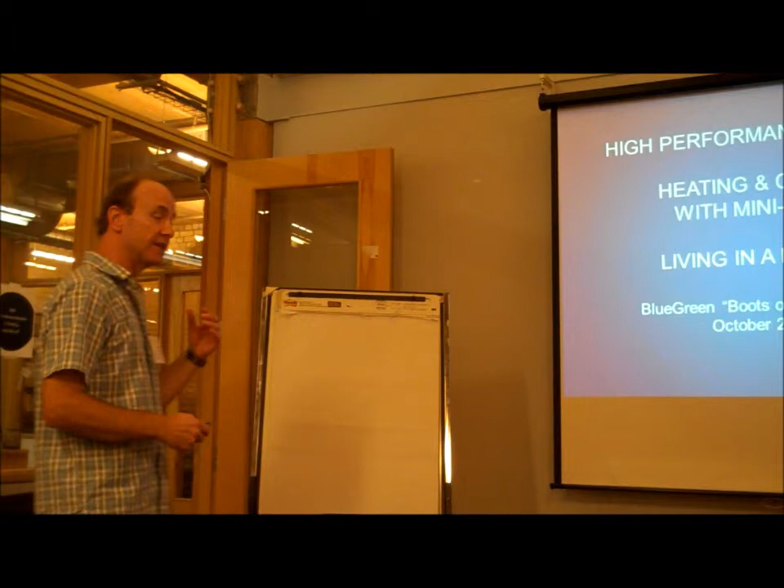Greg threw out some different topics, and I decided to speak on these things. It's a lot to pack into 15 minutes, so fasten your seatbelts. I've done 3 projects now, and I'm about to do my 4th one. The caveat is I haven't got this figured out - there's still a lot of work in progress here. Some things I thought were really great ideas, some not so good, and some will have to go back to the drawing board. But I'm happy to share those experiences with you.

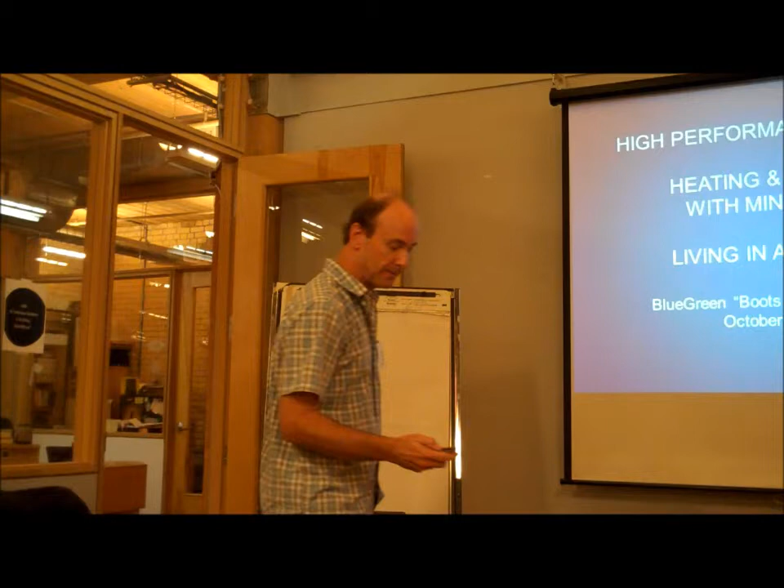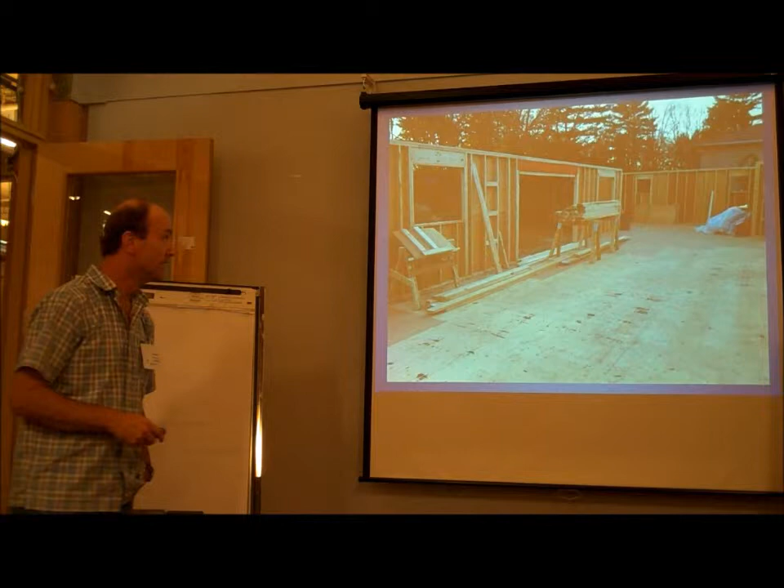Part 1. This is from my recent build, a new construction - the Sandwell build. I want to run you through a high-performance wall, an R42 wall. This is the wall in its inception phase, where the sperm enters the egg, I suppose, and fertilizes it, and you have all of a sudden the beginnings of a high-performance wall. What a great analogy - somebody write that down, I want to use that.

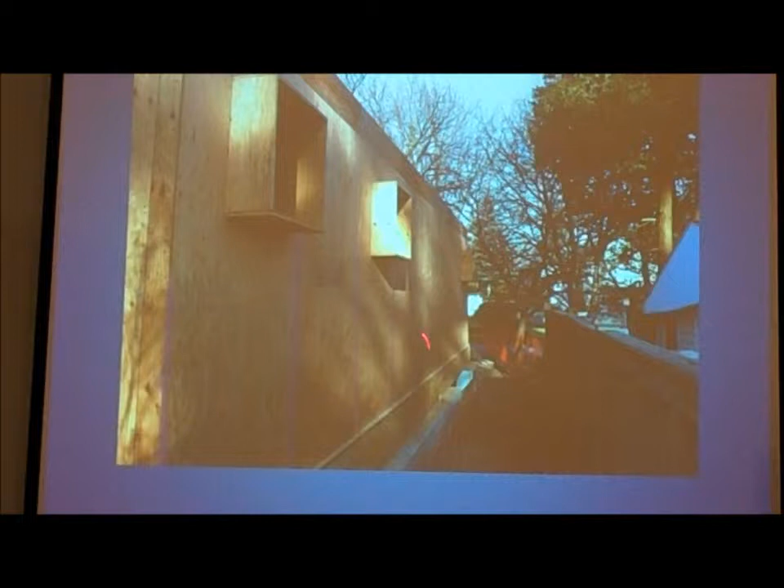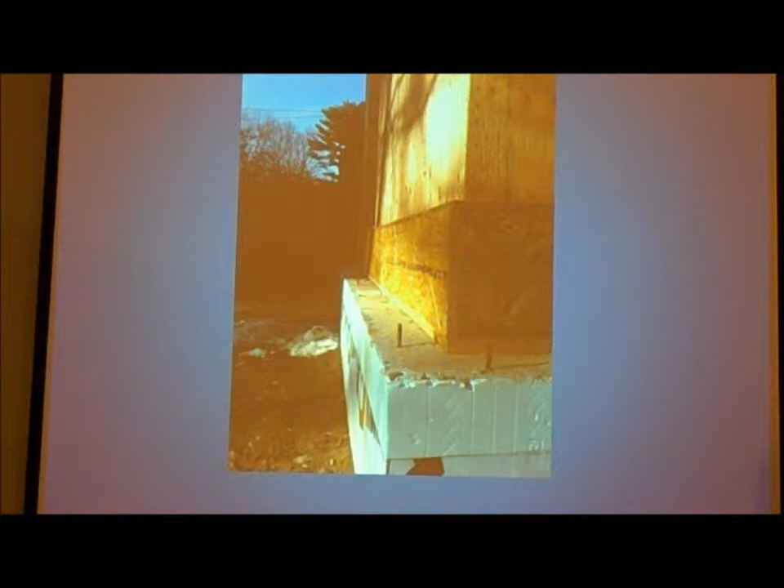You have basically a 2x4 structural wall with plywood sheathing on it. This plywood sheathing forms part of the air barrier, which is designed to be in the middle of the wall assembly so the sheathing stays warm in cold weather. You can see the window bucks are there for spanning through the larger wall to come. This is a side view of the floor platform, sitting about a third of the way onto the foundation wall. Typically it would line up with the edge, but this is the structural wall. There's some bearing left for the wall to come, which isn't structural, it's just holding up insulation.

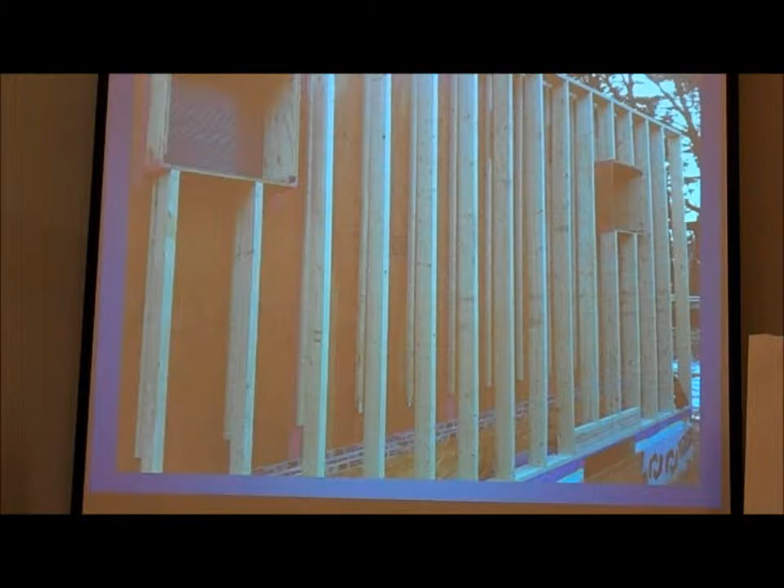Here it is in progress. These are sleepers going against the wall now to create cells, basically. The plan is to insulate the outside wall with cellulose insulation, and cellulose, though I have limited experience, likes to be installed in cells rather than one big open wall cavity. So this is the next phase - a 2x6 wall going up in front of it. Now you have a 2x4 wall on one side, the air barrier, and about an 8.5-inch cavity being constructed on the outboard side of the air barrier.

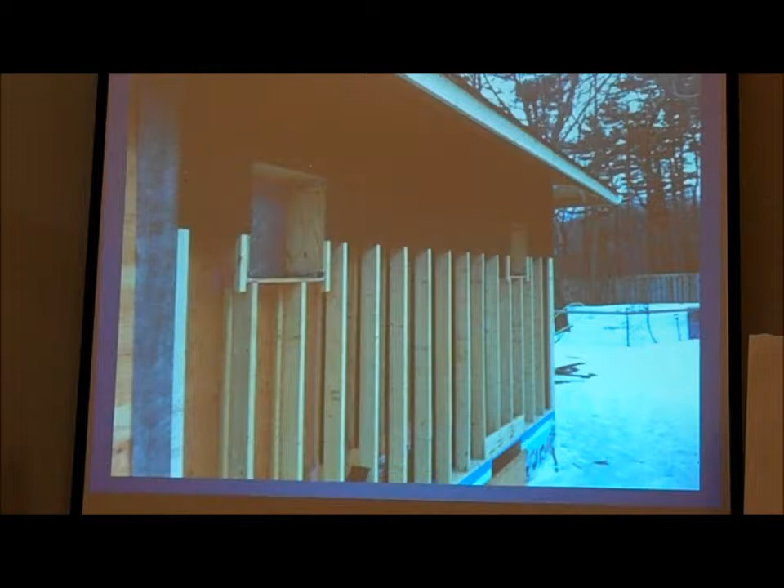This is good old tentest sheeting being applied to the outside now - its main job is to hold in the cellulose. There it is again with the windows installed. In between each of these cells, you can see this black material - strips of the same sheathing to create cells in between the walls, because there was about a 2.5-inch gap between this 2x6 and the sleeper against the wall. This is what it kind of looked like.

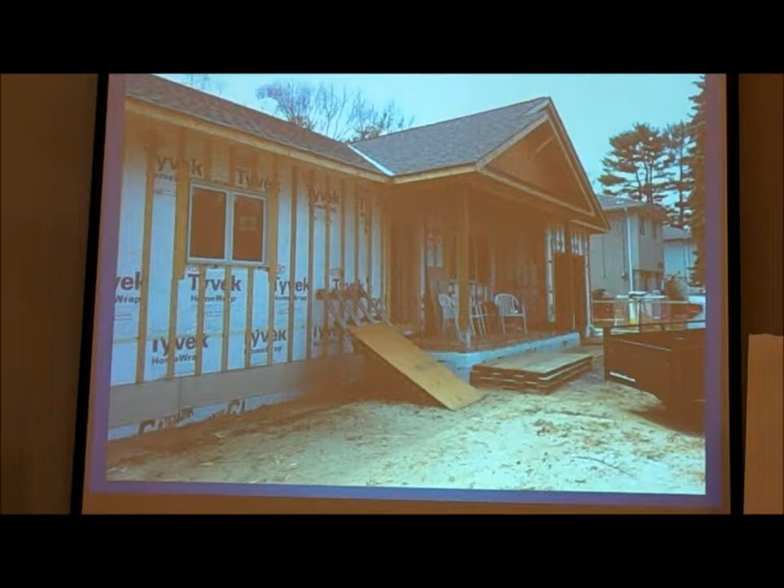By the time the installation crew showed up, all the building wrap was on the wall, and the strapping, hopefully to prevent the tentest sheeting from busting out once the cellulose got installed. One thing to note: your choice of building wrap is important here. If you're trying to build a wall with drying potential, you want the materials to not short-circuit each other. The sheathing behind there has a permeance of 35 perms, highly permeable in case any moisture gets into the cellulose so it can dry to the outside. Tyvek is actually a lot more permeable than Typar, about 4 or 5 times as much, so it was the right choice here.

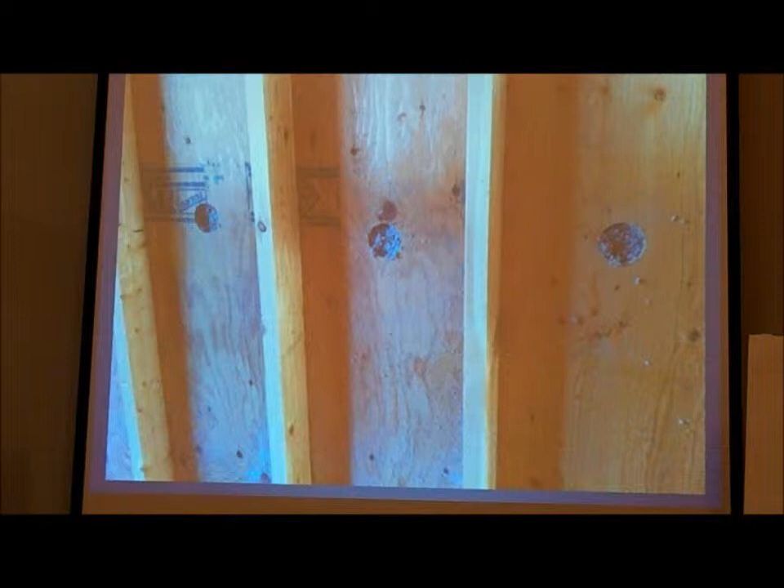This is what the building looked like with its tuxedo on. Now this is the insulation going into the inside of the outer wall, installed from the inside. There aren't a lot of contractors with experience insulating deep walls. This is something, I guess, if we're trying to push the envelope - we design these things and make plans to execute them, but there isn't necessarily the knowledge out there in the trade community to give us what we need. So this was a very good lesson. The idea was to install the cellulose into the middle of the wall so it would fill top and bottom to an even density.

As it turns out, I thought little gaps didn't really matter. This isn't a blowout, just a small gap, probably smaller than a business card, where suddenly the cellulose started spilling out because we hadn't bothered to fill that one little corner. I figured it would bunch up and plug itself, but it didn't work out that way. So not a lot of this happened, but it's actually more liquid than I thought it was going to be.

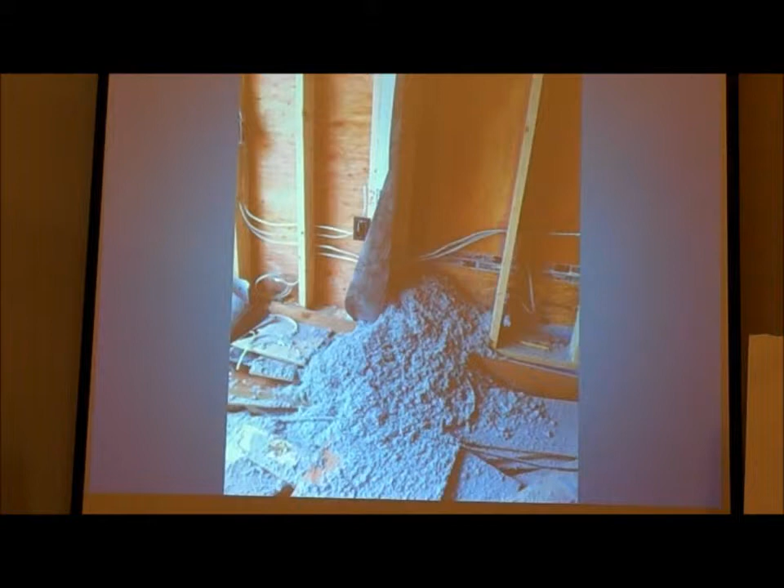The idea was to drill holes around the building and insulate top and bottom. When we did some quality control checks, courtesy of our friends at the Blue-Green Group, we realized we weren't getting proper densities at the top and bottom of the wall. So we had to drill all around the building again, top and bottom, to inject more cellulose into the wall, and then apply air sealing tape to the Swiss cheese it had become.

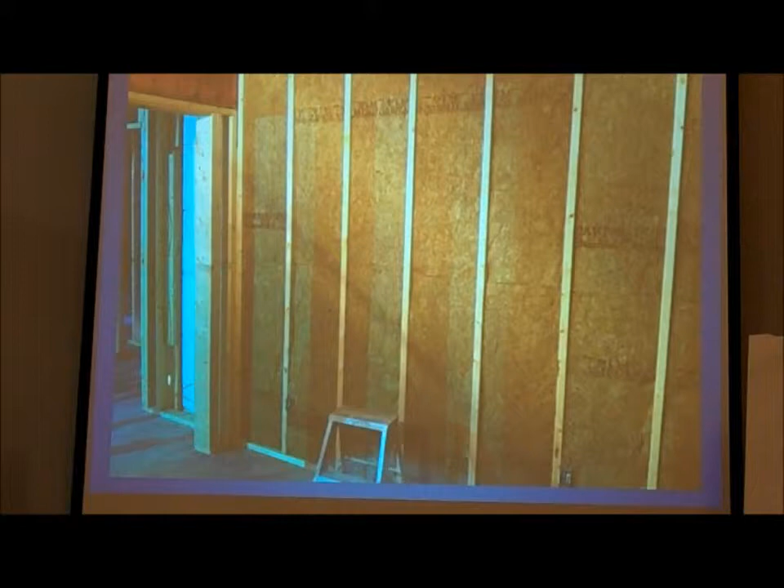And then finally a layer of bats on the inside. So the total combined value of that is an R14 bat plus about an R28 wall cavity, which gives you R42.

All of the structural elements are over-insulated by the cellulose on the outside, so the thermal bridging issue is very well addressed with this particular design. It would have been easier in retrospect to use some sort of I-joist, and there are reasons why I didn't do that, which I'd be happy to discuss later.

The blower door test came in very good. The air sealing details worked really, really well. So it was partially an execution issue and partially a design issue.

The building was designed to simplify air sealing. It was always forefront in the mind of the project, and one of the major objectives was to get us a very, very tight enclosure.

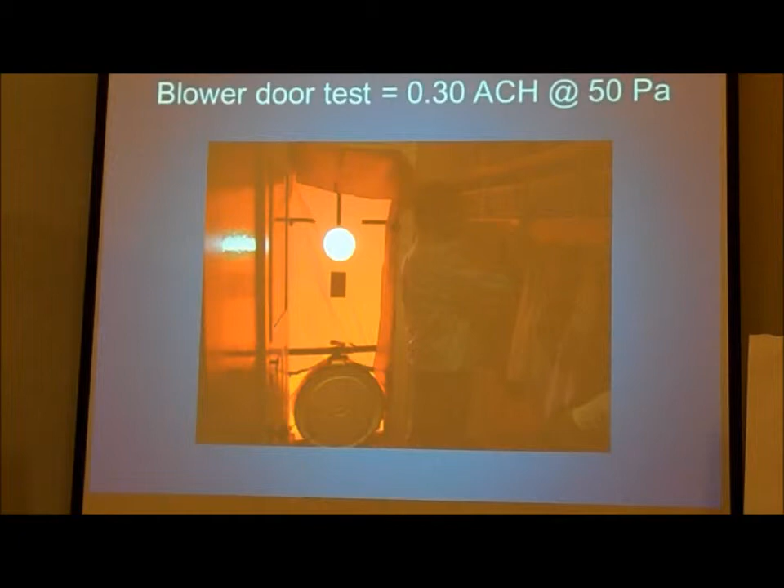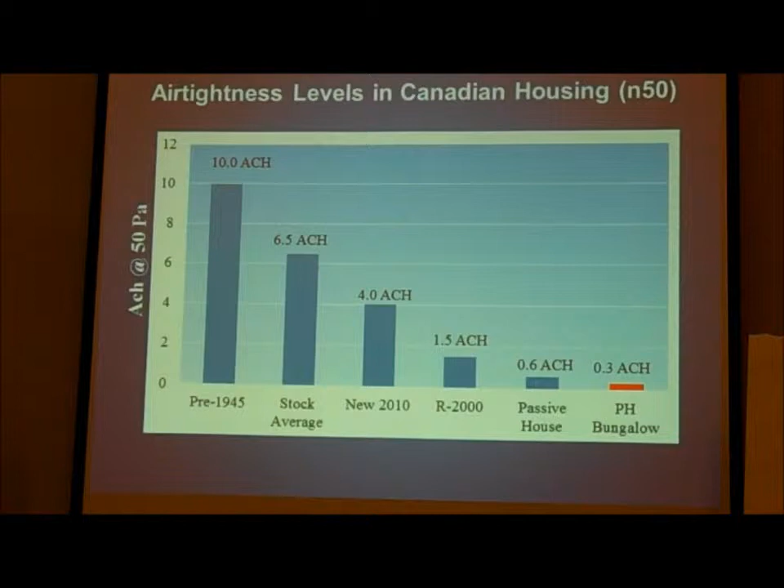Here's where we came in at 0.3, and this is passive house, and this is sort of like 10 down to 6.5—there's your 1.5, just to put things in graphical proportion. Actually, I could have left that slide out.

Next, I want to talk a little bit about mini split heat pumps.

It's kind of like a variety show. You had the juggler, and now I'm going to play the trumpet for a few minutes, and then we're going to look at something else. So...

Facts and fictions: a single head ductless conditions the whole house. This is just not true. It doesn't work—we know that now. The theory was that it could, but it actually doesn't work. I don't even know if it works in Germany where they say it works. So you do need a backup system, and a multi-head system kind of solves the problem, but now you're getting into a costly HVAC system. This is one of the challenges we need to overcome.

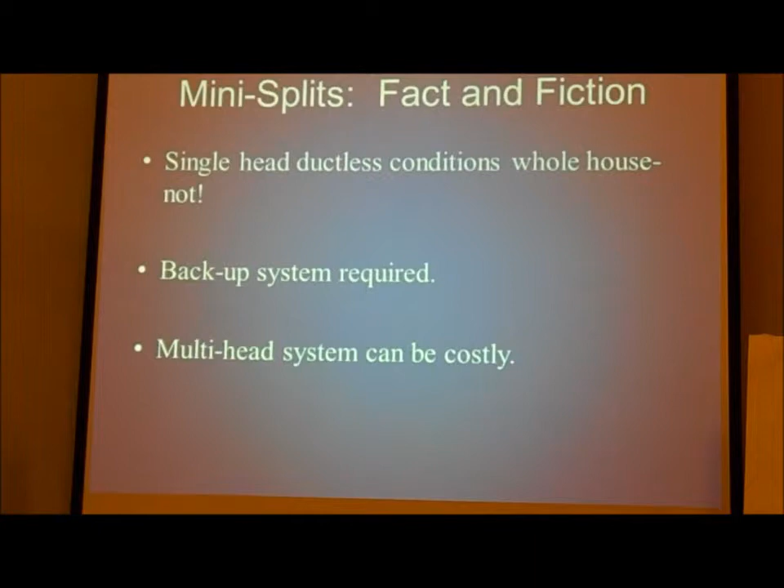The hope is we're building houses that don't need a furnace anymore. Well, we still need some sort of mechanical system—we still need heating and cooling. And how do you do it really cost effectively? I don't have the answer yet, and I don't think anybody does just yet.

This is sort of a little case study on my own residence. This is a retrofit, a deep energy retrofit I did in 2010. My wife and I moved back in 2011, and we've been running with these systems ever since.

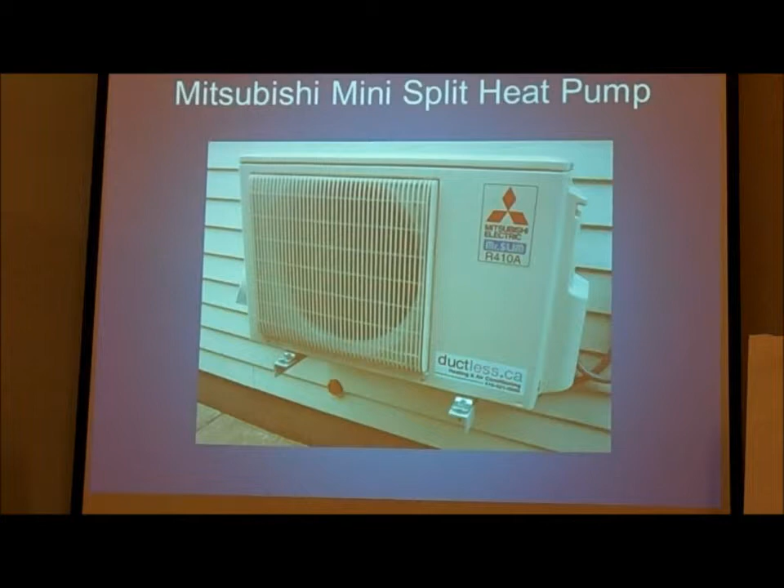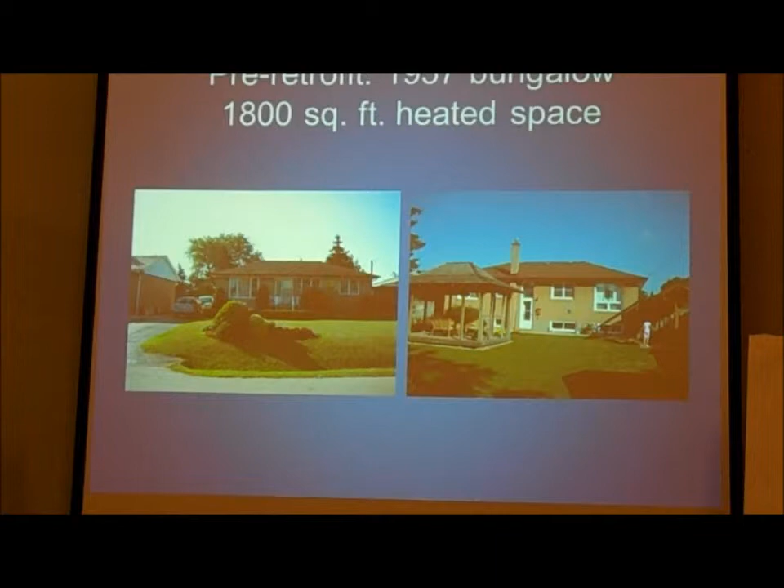This is the house before: a 1957 bungalow, solid brick construction, 1,800 square feet of heated space up and down. This is it post-retrofit now, oriented southeast to northwest.

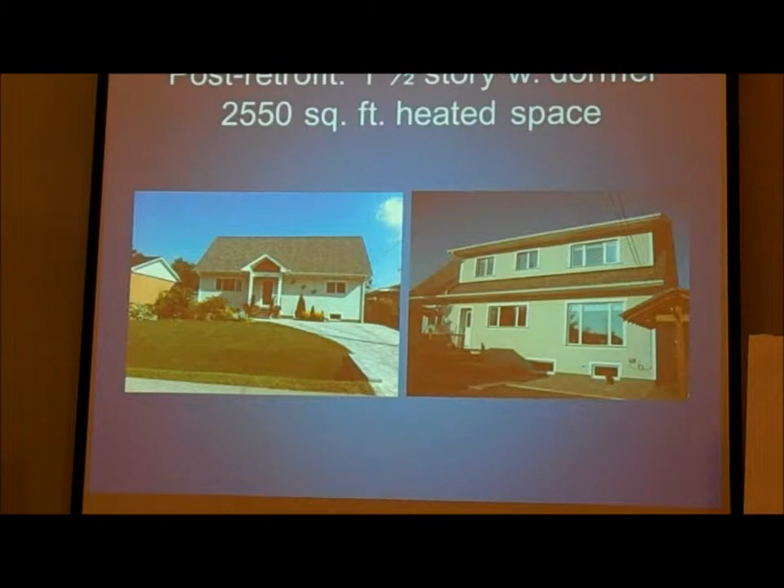I've got a broad overhang, so very good summer shading. This is taken on June 21st, so you can see the passive shading works really well.

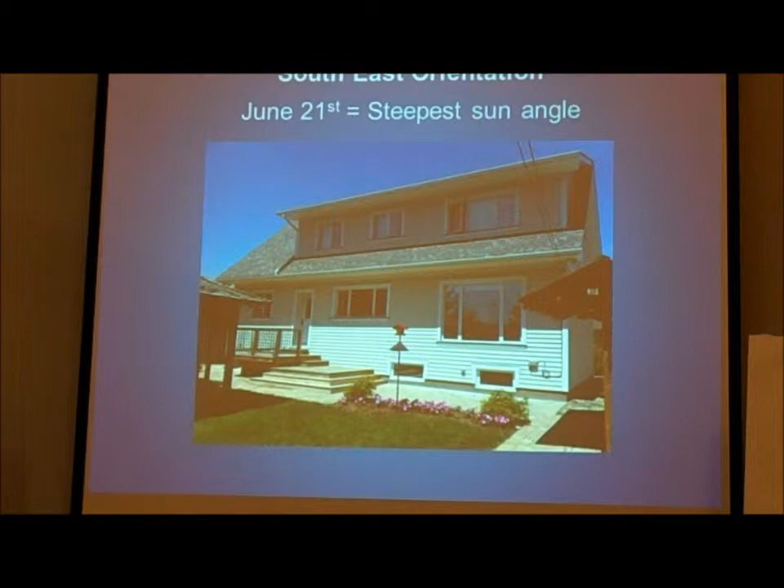A super insulated house like this is really airtight. It's like a thermos bottle with windows. If you have large direct sun exposure, it's going to spike up very quickly, and you're definitely going to generate a cooling load in the house.

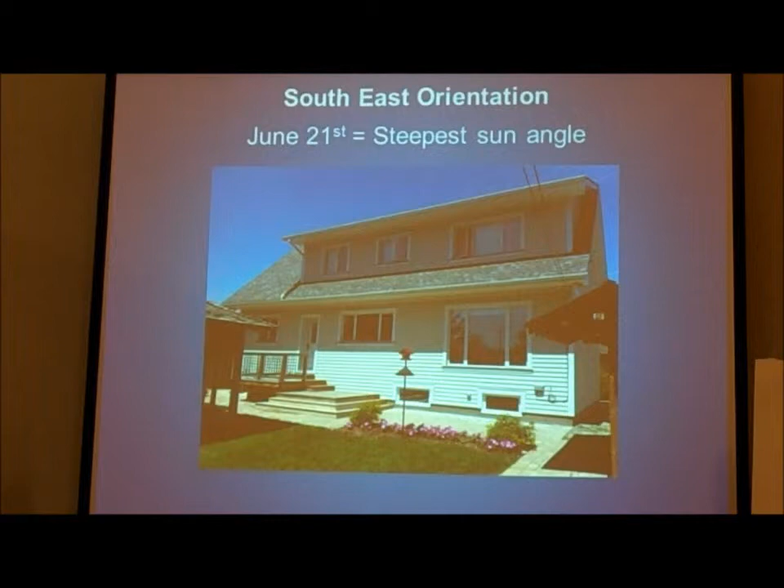Interestingly, we know this is the sun's steepest angle, but it's not the hottest time of the year. The hottest time is probably a month out, July 21st. By then, this sun line has moved up another foot up the window. So there's morning, probably a couple hours, of indirect or sharp angle sunlight, and then eventually perpendicular angle sunlight coming in, and it can spike up quite a bit.

This is it in the wintertime now. The sun just washes right through the house very nicely and right up against the back wall. So we have pretty decent solar access.

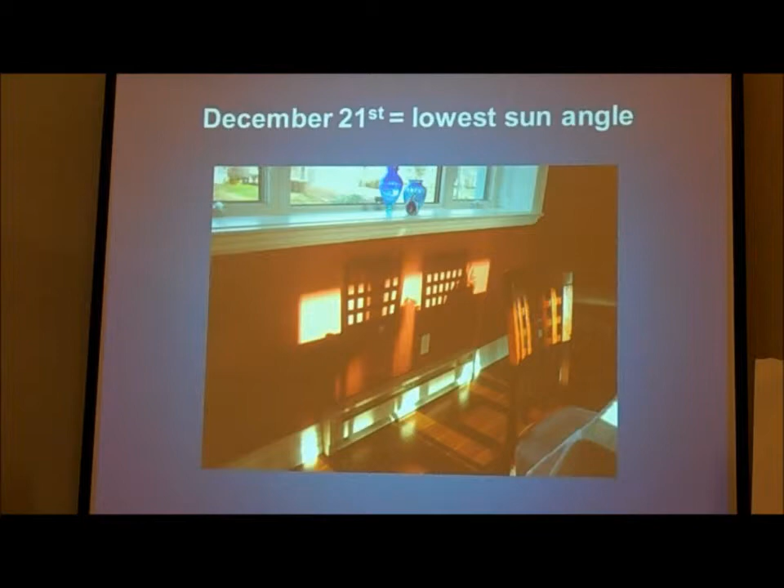The house is super comfortable. On a cold winter day, the heating system won't come on until late in the afternoon if it's a clear day.

There's excellent thermal comfort in all 4 seasons. Again, this is my actual experience of living in this house for 3 years now. Very little temperature variation from floor to floor, and also within a floor. From one end of the house to another, there's very good temperature uniformity.

The relative humidity is very good. In the summertime, it's probably in the 55 to 60% range, and in the wintertime, probably 45 to 50%. And that's without any mechanical intervention. That's just the natural state of affairs.

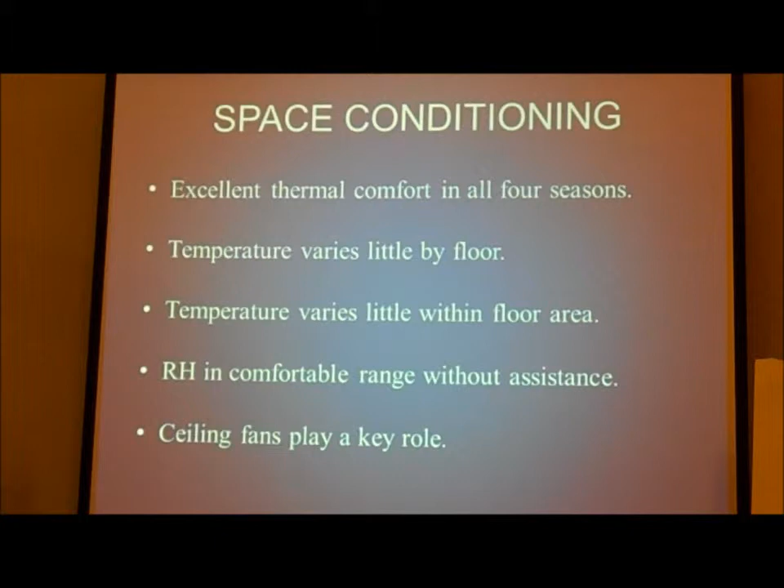There is an ERV that brings in fresh air 24/7.

In addition to the mini split system, I have a couple of zones of electric baseboard heating, and this is the thermostat I have it hooked up to. When I did this, I honestly wanted to believe the single point air handler was going to be able to cool and heat the whole house. It definitely has the capacity. The question was whether it could actually physically do that. And now I know that it won't.

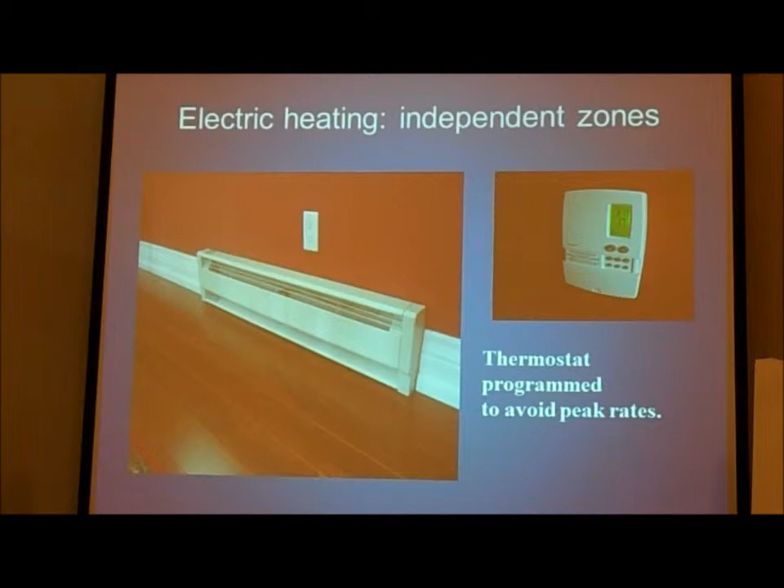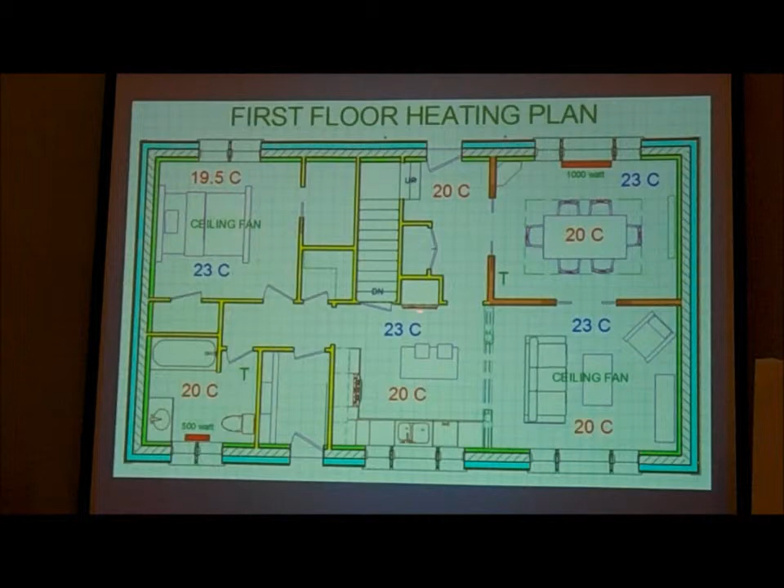There isn't really a thermostat, there's just a handheld remote that you set the temperature with, and I found it to be inaccurate. I don't know if anybody else has mini split systems, but I don't find it very accurate at all. It doesn't matter, you just adjust accordingly.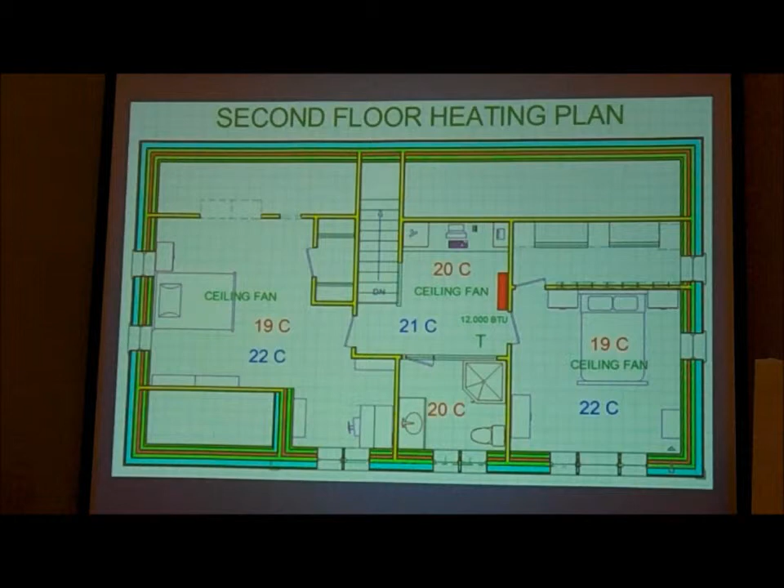Now, we've installed ceiling fans in here to move the air about. Before the ceiling fans, it would probably go up to about 23. So the ceiling fan helps move the cold air around the room a little more and increase the comfort level. 1 degree can make a big difference between not sleeping and sleeping, and this has made a big difference.

The ceiling fans were added in about a year later.

In the basement, we keep the door to the basement closed. There's no cold air from the AC that spills into the basement. There's a very comfortable basement. I think that's always a challenge with a traditional heating system - it can be 37 degrees and humid outside, but going into the basement you have to put on your tracksuit because it's really freezing cold. This house doesn't have that issue.

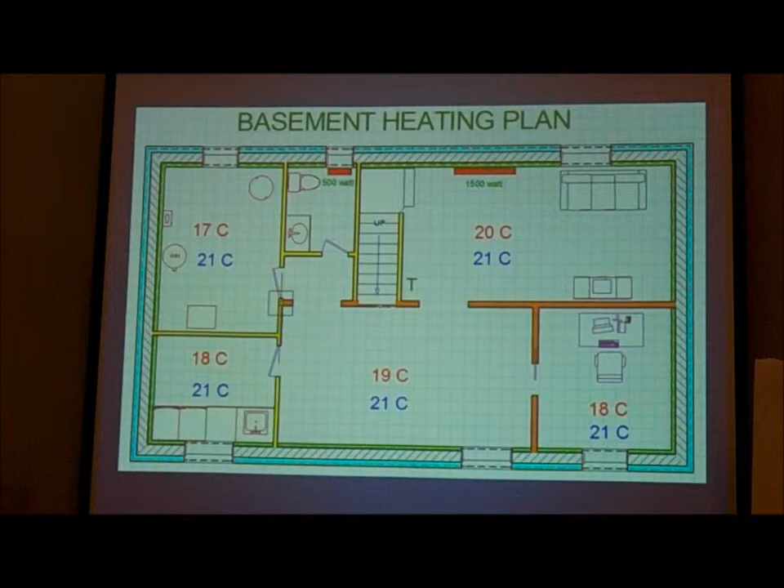This is a typical temperature profile - pretty much 20, 19, 18, a little bit cooler. It's a mechanical room, I've got some HVAC stuff happening, and here's a ground loop that refrigerates things a little bit. When I insulate the pipes, it probably won't happen as much. In the summertime, it's very steady, 21 degrees throughout the whole basement.

Last thing I want to comment on is I actually measure my energy usage, so I can tell you exactly how many kilowatt hours we use for heating and cooling. I have this system called TED, which is connected to my electrical panel. It measures 4 circuits, and this is the control board.

It's web-based, so I can see it here - obviously nothing's going on right now. But it tells me how many watts the systems are drawing. I can look at all 4 circuits at the same time or individually, and it gives a breakdown of usage since midnight, per month, etc. It also tells you what your peak usage has been, which is good to check against how you've sized your heating system.

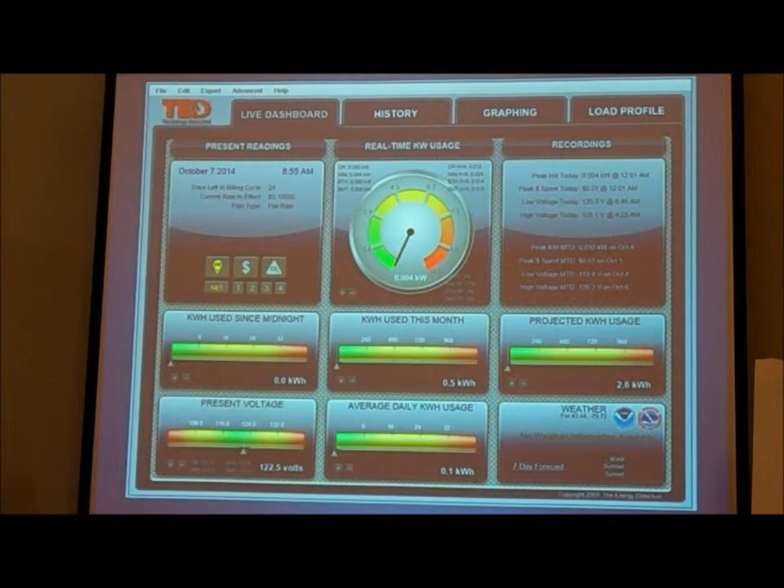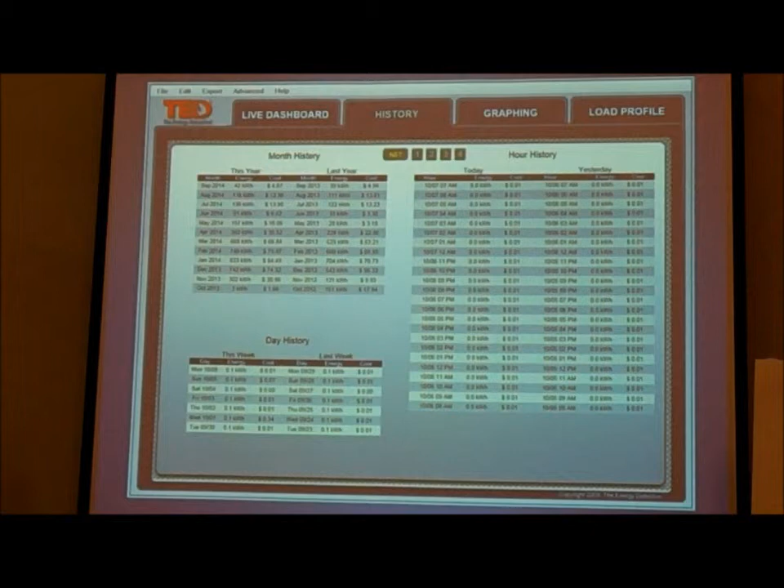On the history tab, there's a breakdown of month history, day history, and hour history of all the different data, so you can compare every day of the week. By selecting up here, I can go with just the mini split or the baseboard heater circuits. This is what the months look like over the last 2 years.

I don't want to go over my time, so I'll keep going. This is just a graphical thing - there's a number of different options. You can see minute by minute, hour by hour. This is a couple of weeks in January.

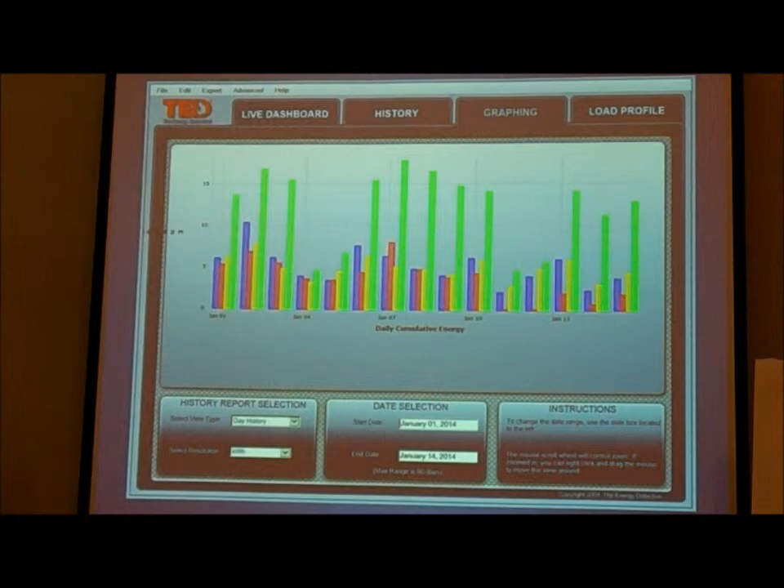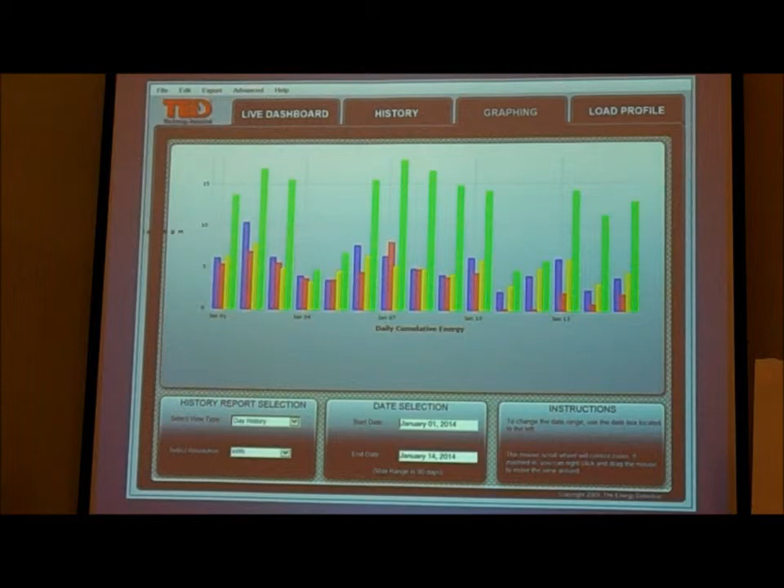I just wanted to point out, you can see there's a dip here on the weekends, and that's because we do our laundry on weekends. Basically 100% of the energy from our laundry operations gets recycled inside the house. We have a condensing dryer, which discharges warm, hot, dry air into the house, giving the heating system a bit of a break.

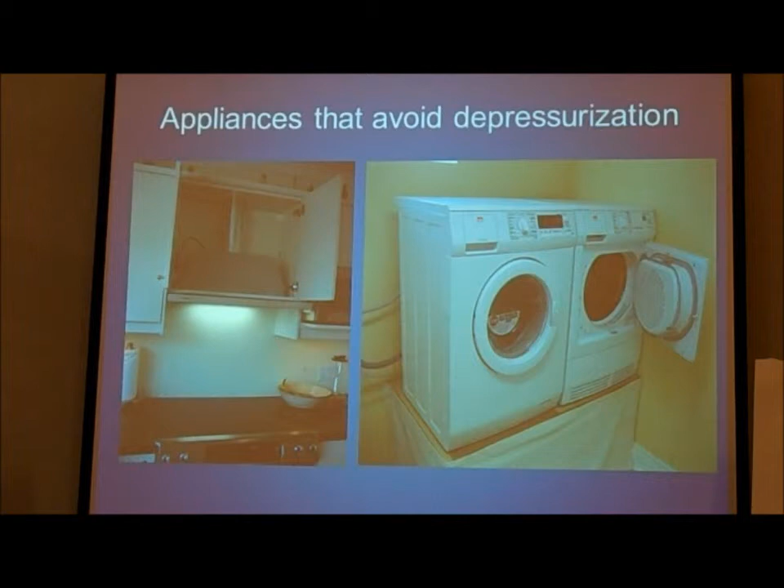There it is right there. We also have a recirculating range hood, which again keeps the conditioned air inside the house - it doesn't depressurize the house.

This system has enough capacity to heat the entire house, but it just doesn't work that way. The heating is dispensed on the second floor and it does not redistribute throughout the house - it just gets too hot and we have to turn it off.

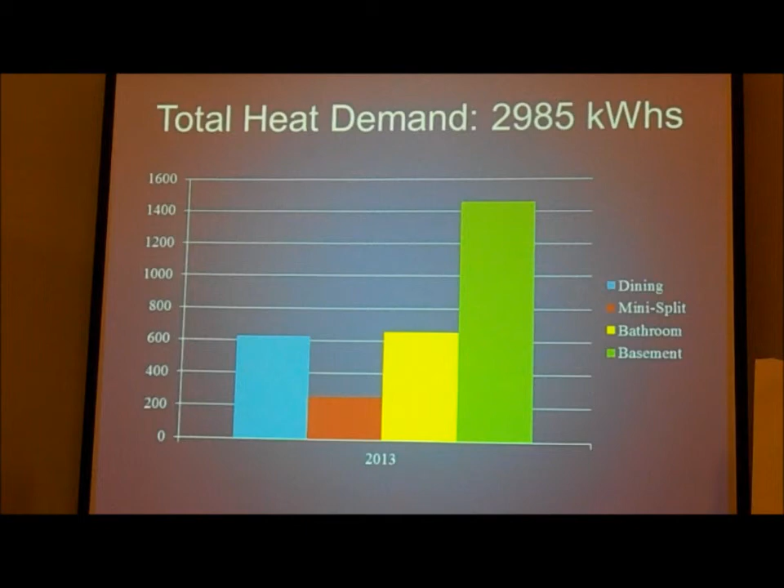This is the actual breakdown for 2013. The entire electricity cost for the entire house was $1,370 - just over 10,000 kilowatt hours. Just under 3,000 kilowatt hours is the heating portion. At 14 cents a kilowatt hour, that works out to $400 for the entire year, and that's all delivery charges included.

14 cents a kilowatt hour seems high, because I'm really good at not using electricity on peak. The thing is, by the time you add in the delivery charges, it starts to get up there. Also, if you actually use less, you're amortizing over fewer kilowatt hours, and it doesn't look as good. So anyway, that's my average cost, 13 cents a kilowatt, for all of 2013.

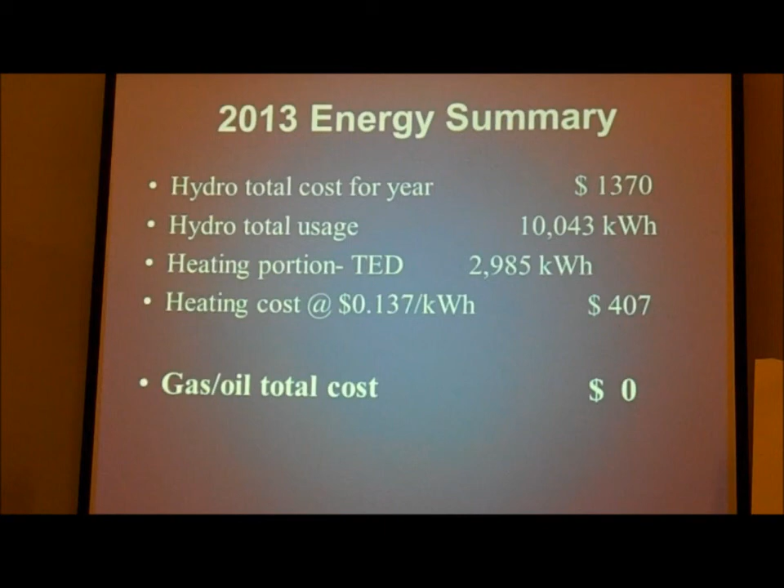Last winter, we probably paid closer to about $525 for the whole heating season, and that's again like 92% on electric baseboard heaters, which is the most expensive way to heat a house. So, lesson learned - I would probably have installed a ductless head in the basement and a bigger system that would offset a lot of the heat that is going on.

And I'm thinking of using this as my company logo now, because it got such a huge, phenomenal response from the room that I'm going to use it as my company logo now.